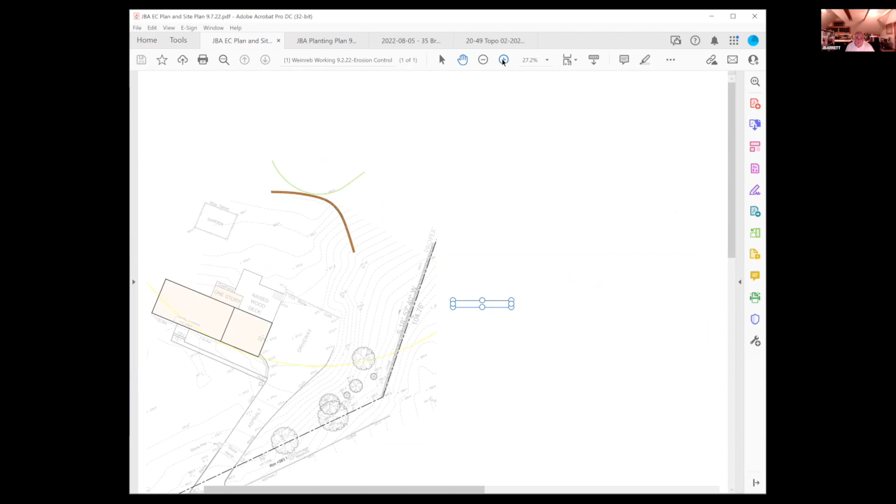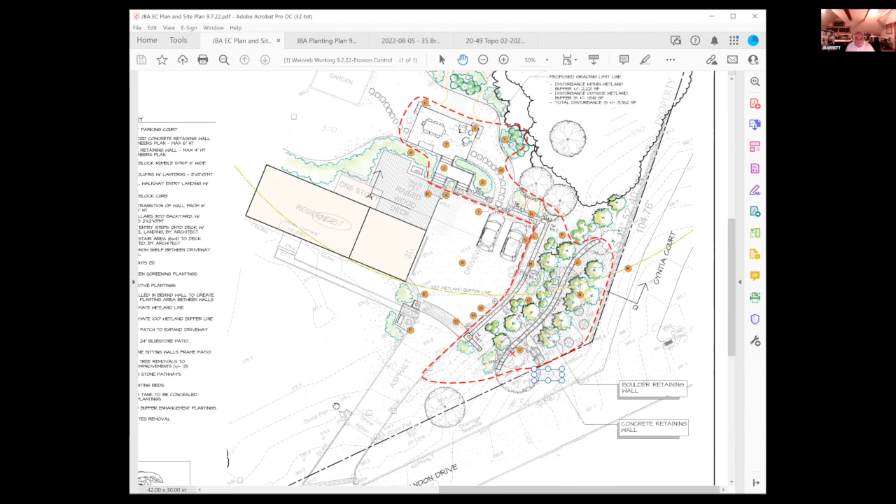So by way of background, the board will recall that this project is on the corner of Cynthia, the new subdivision road that goes up to the Brandywine subdivision, and Brandon Drive. And what happened was, as a result of the subdivision, the clearing and whatnot took place. And while I think the original design plans called for some kind of screening or tree plantings along Cynthia Court to provide some privacy to the Weinrebs, whose rear yard this is, that didn't happen.

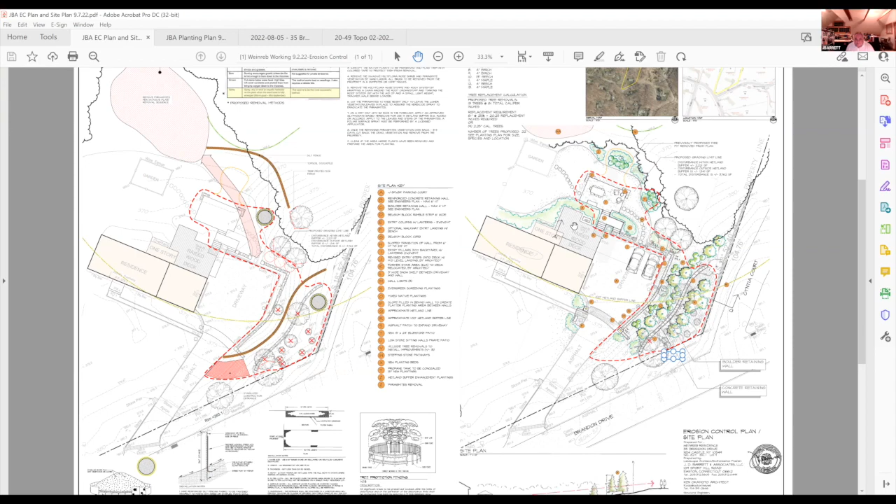That combined with the linking up of open spaces in town, and there's now a little hub where you can park your car. And there's just a bunch more traffic on here, and the Weinrebs enjoy their backyard, but they felt like they lost their privacy. And we were retained to say, what can we do to help them get that back? So we talked to town staff, and we came up with this plan.

So essentially, this is their back deck area, and this is their driveway area, and this is Cynthia Court. And what happened was, now there's this direct sight line between there. So the idea here is we're going to take this existing sloping grade, and we're going to create like a parking court driveway area. There's going to be a wall. It's about 3.5 feet here, and it goes to about 6 feet in this corner.

And what that does, it kind of gets that grade up. And then we're going to do a boulder wall up in this area here. That's going to be about 3 or 4 feet. And the idea is to get the grade up so then we can come in and put in 10 to 12 and 14-foot evergreen trees.

On this shelf in here, we would plant evergreen shrubs and some native material. So the idea is when the owners look over, they'll see the wall and this evergreen screening, but they really won't see their boulder wall. The idea of the evergreen screening is to regain their privacy.

So that's been fleshed out. We have a planting plan for that.

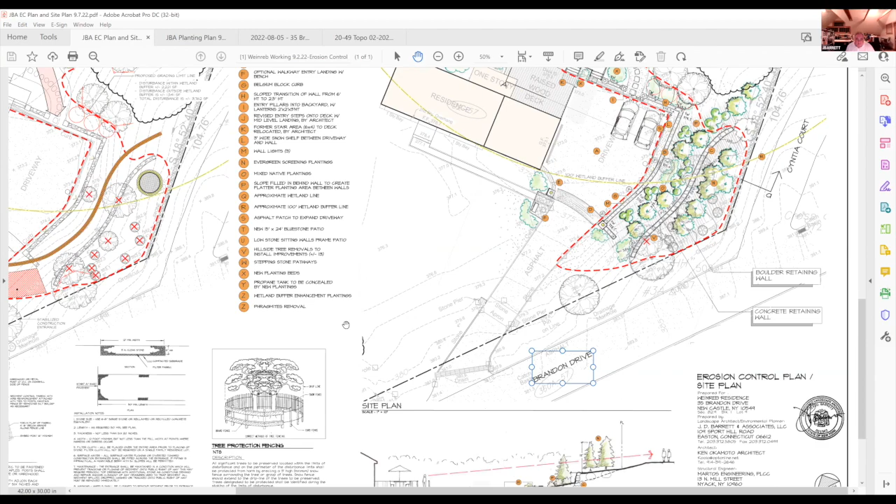You'll recall the owners decided to improve things. Right now they have a very awkward way to get up on their deck, so that's going to be closed off and they'll regain this deck space. There's going to be a break in this wall and then some stepping stones, and a lower patio in this area. Previously there was a fire pit here, but that's been eliminated from the plan. Instead there's just going to be a small patio that steps up. You'll come in, step up a couple of steps to a landing, go down a couple of steps to get to the patio, and up a couple of steps to get to the deck.

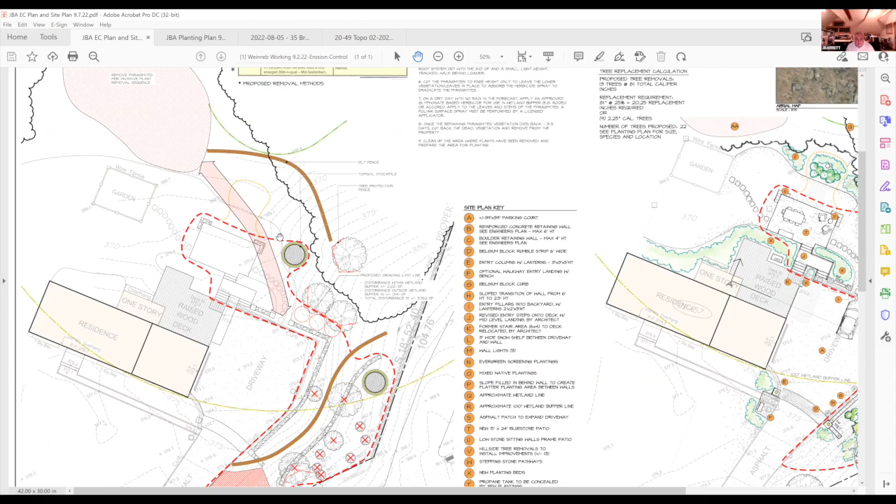So we showed an erosion control plan. There'll be silt fences down slope of all the work areas. We show the grading and clearing limit line in red, and this was the area where that Phragmites has taken over.

There are various methodologies to take out Phragmites. The one we prefer, which the board may remember reviewing and endorsing on the Rabinowitz property on Gary Drive a couple of years ago, is to come in at about this time of year, cut down all the Phragmites, drag it out, and put it in a dumpster in the driveway where it gets taken away. Then the Phragmites is allowed to sprout back up.

When it gets to about knee height, they'll hire a licensed applicator to come in with rodeo, a form of Roundup better suited to wet environments. We'll wait for a dry day, they'll go out there and spray it, and that process will be repeated as necessary until they get control of the Phragmites and get it out of there.

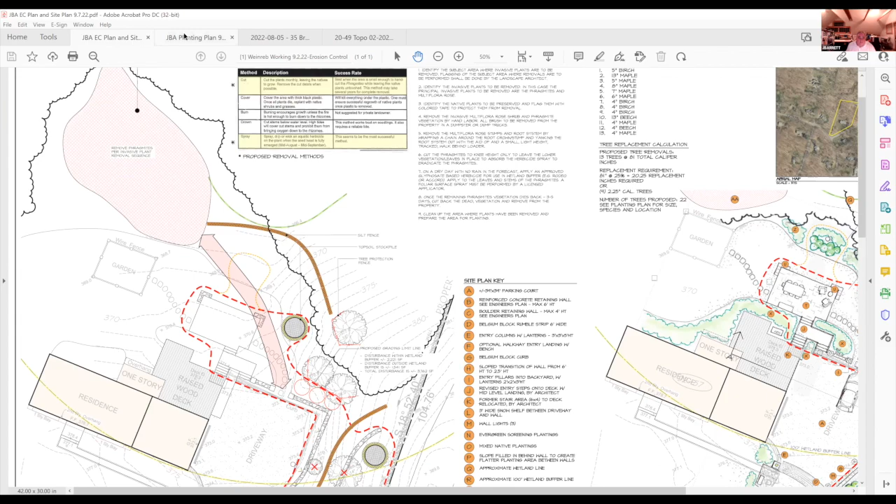So once that's all done and the walls are built - the boulder wall and the other wall - we've developed a planting plan and mitigation plan. Here's our wetland line, and here's our 100-foot buffer line. These are the evergreen plantings that'll happen up higher on the slope to block the views.

This is the shrub layer, a lot of evergreen in here. We're taking out 3 large doublefile viburnums in this area and we're going to transplant them around the property. Then we'll put in some Limelight hydrangea and inkberry to kind of frame this area.

When we get to the edge of the lawn going down toward the wetland, we've got groupings of perennials and some shrubs and small trees like dogwood. And where the Phragmites was, since it's pretty open, we're going to try to close this forest edge back down so it comes across here - 3 red maples and some smaller shadblow trees to kind of layer it.

We'll also be doing some shrubs like buttonbush and elderberry in groupings. And we have large swatches of Joe Pye weed and New York ironweed to colonize the area, which will give nice color in summertime, plus some shrubs around the edge. So that's where we are.

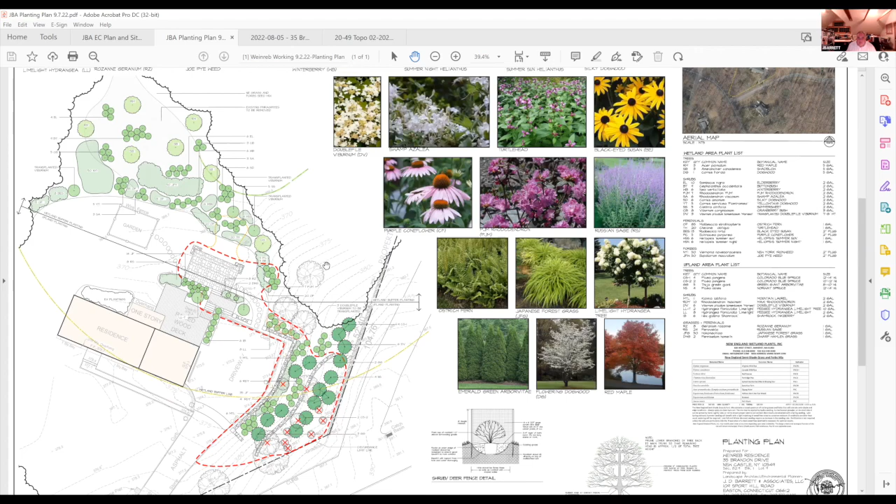I think the last time we met with the board, they wanted to see more information on the planting, the mitigation, and the erosion control, and they also directed us to file with the building department, which has been done. So we're back now and we're hoping we can move this thing along to a conditional approval so the owners can schedule the work.

Great. Thanks, Jerry. Dennis, what do you think?

Only a recommendation: if you're going to cut Phragmites this season, I wouldn't be averse to getting a first application in. Sometimes that translocation process, when they bring their nutrients back to the roots in the fall, you could have them bring some of the poison with them. Then in the spring that almost represents a second application for what you didn't get. That's just a recommendation — the owners' reps, if they've hired someone who uses a different method, that's fine. But that's what we would do for wetland restoration: try to get a first application August into September. That was usually the window.

The only other comment I was going to make — these were observational, since I like walking through wetlands — at the owners' rep's place it was helpful because I accidentally stepped on one of the landmines while playing with her dog back there, and going through the wetlands helped remove all that landmine remnant off my boot. But I had taken notes just for your benefit.

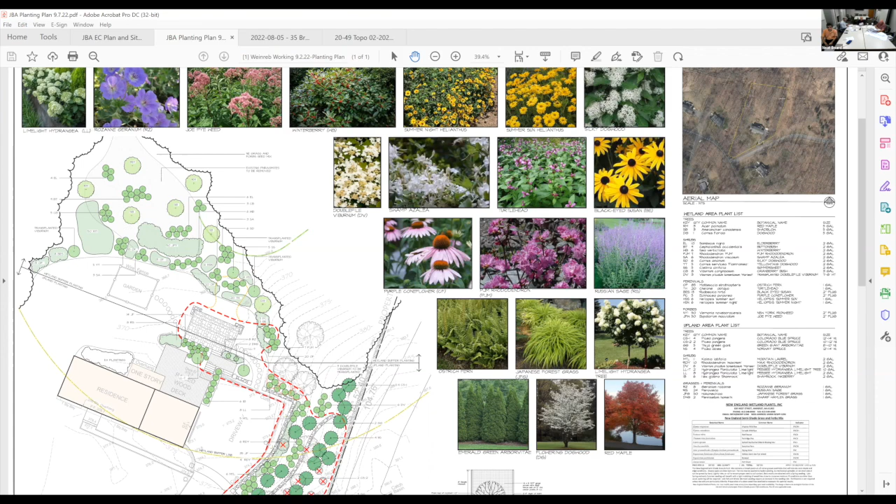I have a question — are they going to start this fall? I think if they want to clear and spray, I'd be fine with that, because otherwise you're getting delayed months just to apply herbicide. And this is the recommended time — even if they didn't have a project associated with it, and somebody said to me, we want to plant natives and get rid of Phragmites, would you approve this? I'd say yes, now's the time to get rid of it.

Just even to get the wall in place, planned in November. Yeah, still good — some of the evergreens especially, you can go up until the 15th of November, shouldn't be an issue. And the construction, that can be done through what, December? As long as it's not 20 degrees.

Right, that's concrete. I think the owners would like to get going as soon as they possibly can, so I'm going to discuss it with them tomorrow, but I'd like to get that Phragmites out of there ASAP. If we can get some of that stuff to regenerate in the next month or so, we might get our first application in — I think that's the best case scenario. Right, makes sense. Good luck. Yep, okay, thank you, bye-bye.

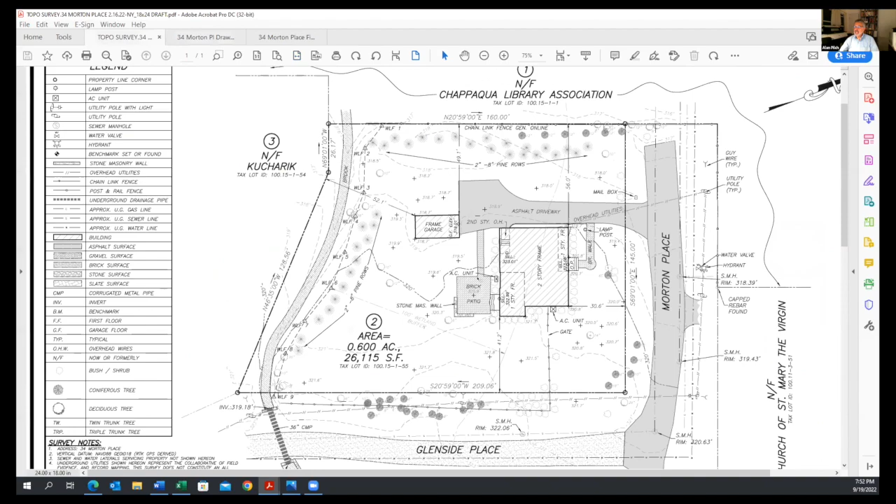The other thing being proposed is a flagstone walkway to connect from the driveway to the addition and also into the house. There is an existing brick walkway here, but that'll be removed and replaced with a flagstone walkway.

This also shows some of the erosion controls being proposed. When we reviewed this, with the proposed addition and the wood deck, we calculated an impact to the existing condition impervious surfaces in the wetland buffer of 2,649 square feet.

With the modifications to the plan, that would increase with the addition and the construction of the deck over the brick patio, to 2,922 square feet, for a total increase of 273 square feet in the buffer.

What is being proposed as mitigation - I could show you a picture of this - the way the runoff flows on this property, it all essentially flows behind the garage and out this way to the water course, which flows from north to south.

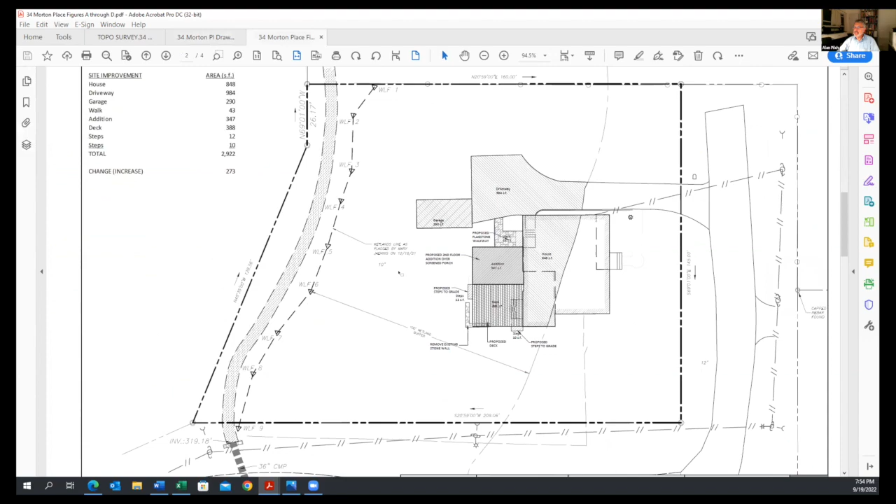That's essentially the plan that we had developed. We also looked at the total amount of increase in impervious surfaces, and saw that from the existing condition to the future condition, we calculate an increase of 342 square feet of new impervious surfaces, which would put us below the 1,000 square foot threshold.

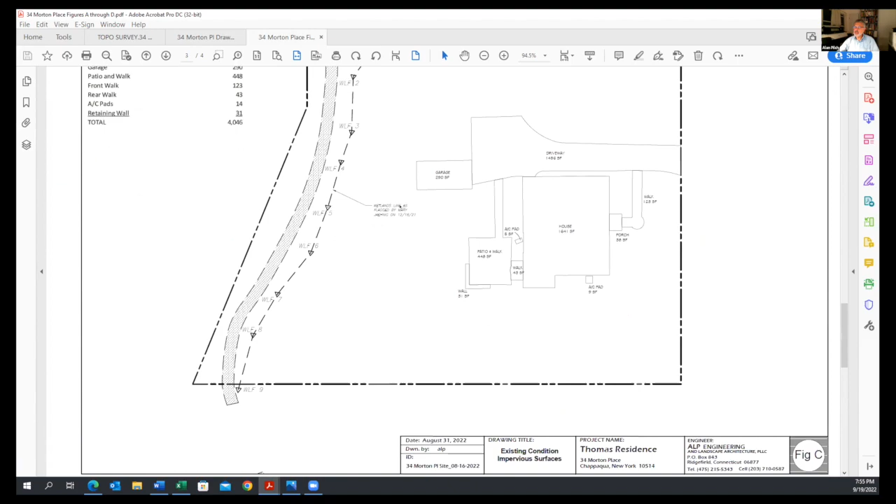I'll just say, Tim, is there anything else you'd like to add to that? Just that the foundation of the screen porch second floor addition is going to be built out of individual brick piers, like 2 foot by 2 foot in size, to avoid digging out any full depth foundations and minimize impact, I think, for the land and certainly any issues that could possibly occur in a new foundation there anyway.

Right. And the fact that we're removing that patio and the deck will have gaps in it to allow water to pass through where it currently can't. So kind of swapping out the patio for the addition, in my view. Right. And typically what we do is put a little stone or something underneath it. Correct. And so I can unshare if you like, or I can just continue sharing. No, that's fine. If you could leave it up, that would be good. Okay. Great.

So Alan, what's the height of the new deck? Is that going to be basically at grade? It's going to be slightly above grade by about 1.5 feet, because right now there's a few steps down from that 1-story area you see there adjacent to the deck. You come out a sliding door down, I think, 3 steps onto the patio that's on the ground, but we're going to have you coming out flush from that door. I have my plans up too, if you want to take a look and see what the elevations are going to look like.

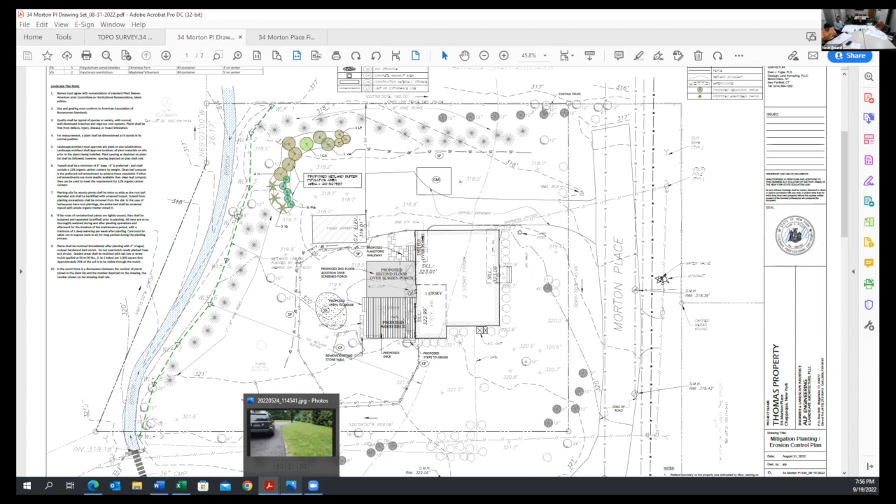Sure. And I will unshare. Okay. So no crawl space or foundation under the second floor. Doesn't sound like it. There's a screen porch. Yeah, I can show you also. This is the 1-story area where you currently come, from Glenside Place. You come down those few steps onto the current patio, which is right on grade. The grade's essentially flat around this section of the property. So the floor joists will be up in here, and there's just a screening to keep critters out from underneath, but it's basically just earth and gravel underneath this deck.

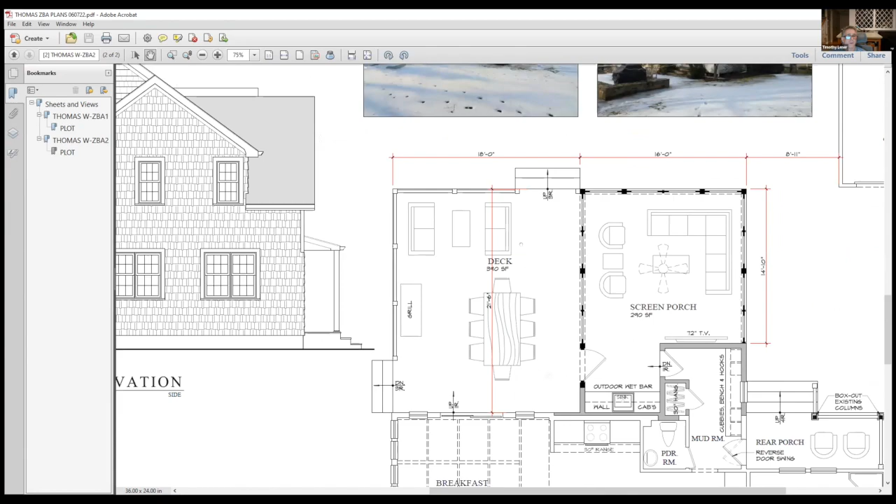If you like, I can show you a picture of what it looks like back there as well. I've got that too, Al. So here's where you see the foundation piers supporting the structure. And again, it would be as minimal digging as possible. So here's the view. It was a little cold when I was taking these, but you can see this is that little rise Alan was talking about. It's essentially flat. The water runs off towards the back of the garage over there. And this little corner wall is what defines where that patio currently is. And you can see the steps coming down from the dining area right now. So all of this is proposed to be removed.

Yeah, if you unshare, I could just show you a picture too that I have. For a moment. You can also see it here. This is where the patio will be removed. This is the wall that's here. You can see it's up like 3 steps, so it's like 1.5 feet up. And that's where the deck's supposed to go.

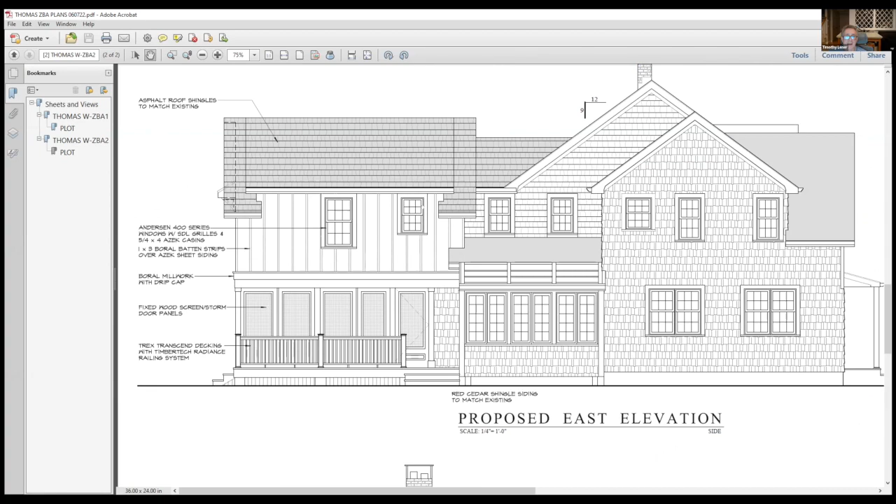All right, could you take us through the elevations on the new structure? The architecture? Yeah, just put it up again so that we can see what it's going to look like. FYI, we got zoning and ARB approval already, so they kind of liked it. So here's the view from the road again. All of this is existing house here. The screen porch is going to be made up mostly of screen doors with panels that you can swap out when it's cold. And up above, we've got a bedroom and a bathroom over here. We're remodeling some bathroom laundry space over there.

And this is the back part that faces the wetland, so to speak. Everything here is basically existing. We're dressing up the rear porch. These are the steps down from the existing rear porch that Alan mentioned before, and this is the walkway over to the driveway, which is over here. So we've treated the addition to specifically look a little bit different from the existing house, which is wood shingles. This is going to be a board and batten material here. We've kept the eave lines a little bit low and popped up a dormer to minimize the massing of this thing.

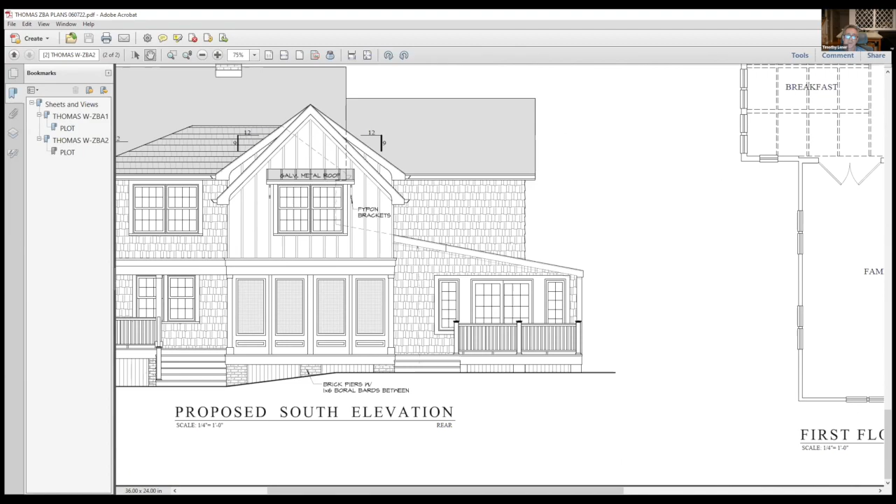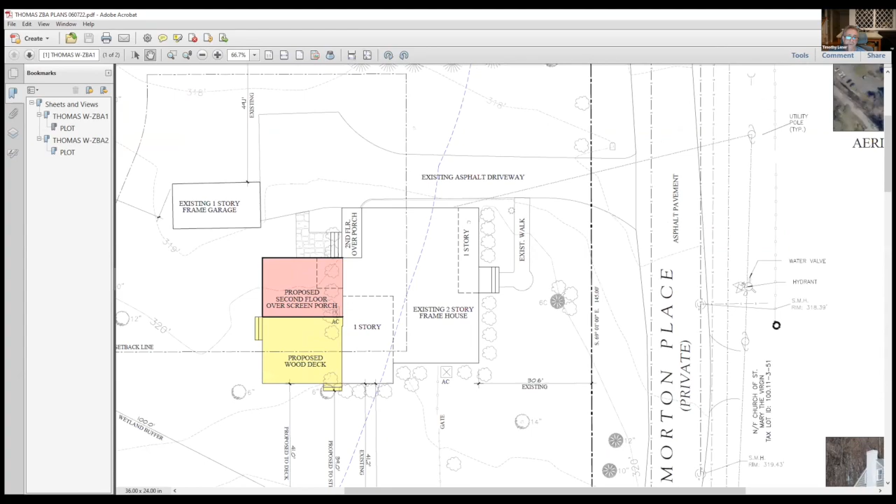Question for you, the flagstone from the existing, it kind of fades out in the drawings we have. Are you saying that's going to extend down to the driveway? So here, my version of Alan's site plan. So yeah, it's not that far. Right now there's a door that comes into the house underneath this porch right here, and I believe the stairs just go directly out onto the driveway. It's kind of a weird concrete structure that's not a very good flow of space for sure.

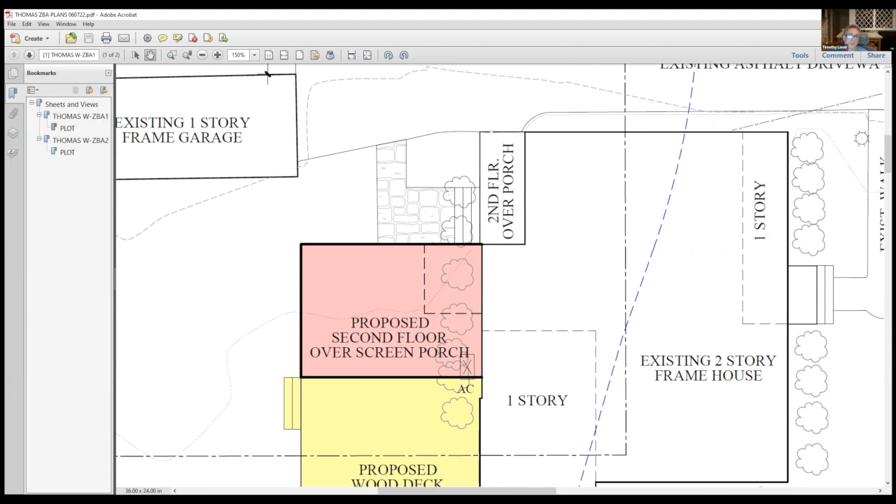So what we did is we relocated the steps down to here. And so we can build out this area of the porch and have a place to sit and watch their son play basketball over here. So this little area is proposed to be new, where currently there's that path that Alan showed on the existing survey that goes roughly from here straight down to the existing patio.

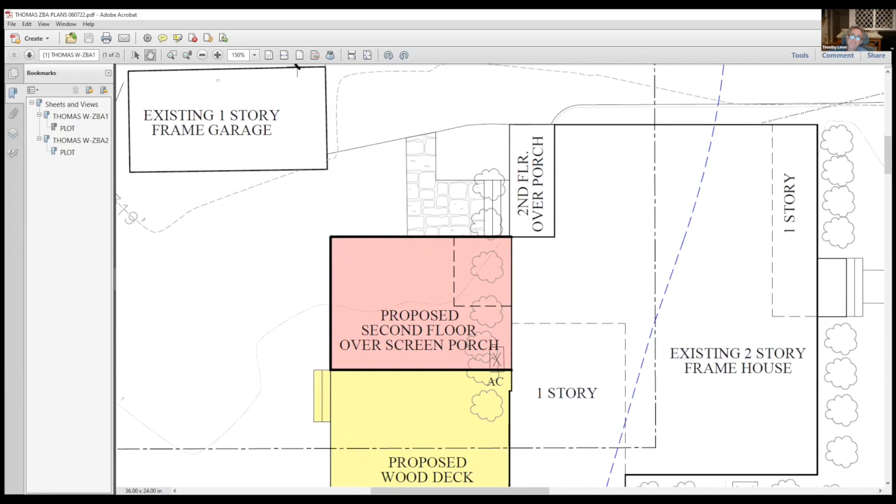Right, there's a brick walkway that goes from the driveway. Yes. So it'll be removed, and a portion of that brick walkway will have the addition, and the rest will be replaced with the flagstone. Got it. And how are they set? Flagstone is typically set on 4 to 6 inches of sand.

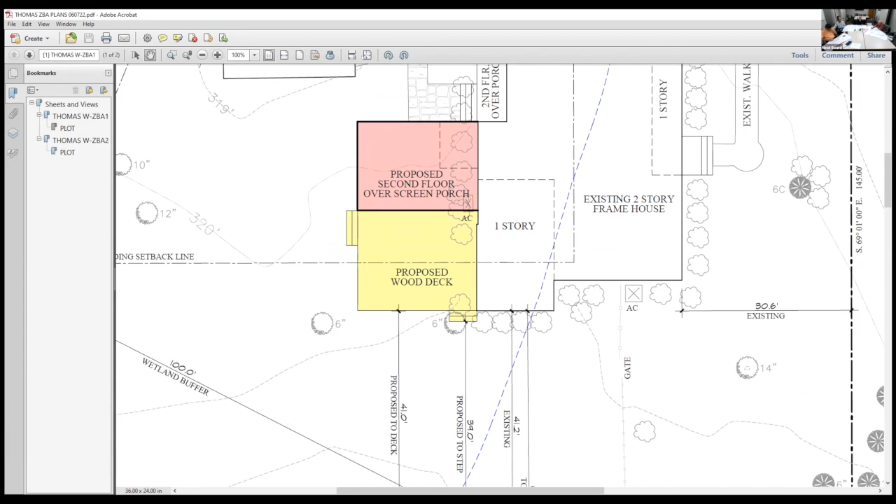Well, yeah, there's 2 ways to do it. It could be done in sand or concrete. We all know the sand is going to move a little bit more than the concrete will, but I don't think we're opposed since all of their existing walks are set in sand. We can propose doing the same thing. What's the existing brick? Is it set in concrete? No, I don't think it's set in concrete. I don't think so either. I think it's set in sand and stone dust.

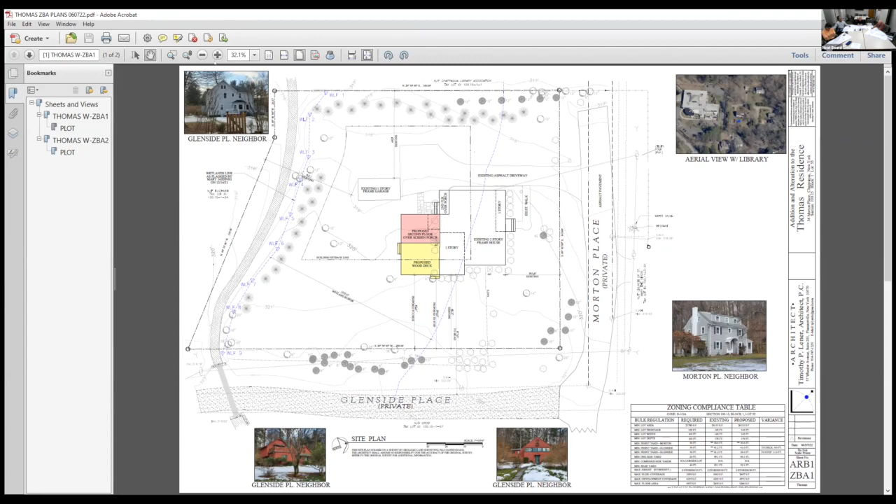So are you saying that in terms of coverage or impervious surfaces, the walks are kind of a wash or what? I counted the walkway as completely impervious, just to be conservative. Yep. I think there's probably more existing walkway than we're proposing here too, right, Alan? I don't know if in your little chart you had the breakdown of both, but I think it's either a wash or we're less.

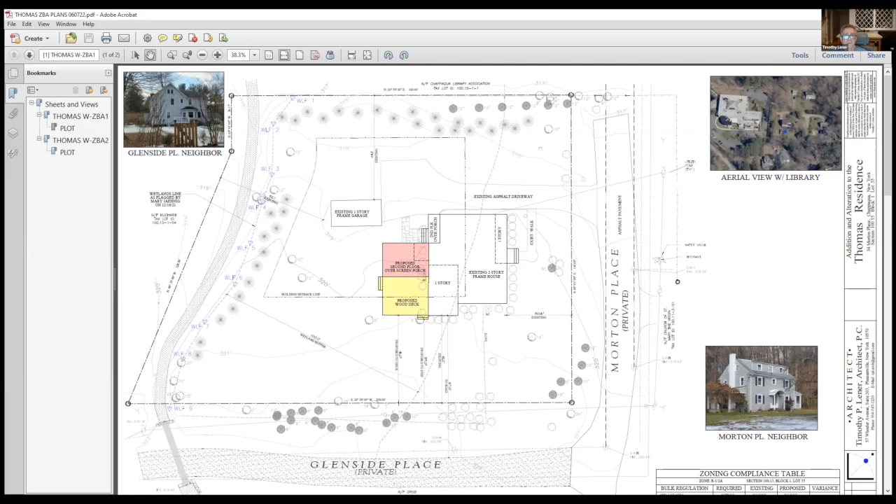Yeah, well, I had both patio and walk calculated together when I did the calculation, so I didn't really split them up. But I had 102 square feet for the new walkway to the rear of the house and to the driveway. And then what are you doing with the leaders and the roof drainage? Where's that going?

Right now, I walked around there plenty, and you see it go into the ground. So I think the one in the front left, if you're looking from the street, goes actually onto the ground surface. That's my recollection. But I think the other ones go into the ground. So they probably either go into dry wells or perhaps are discharged into the water course. I walked along that water course. It's pretty dense, but I was looking for any drain pipes and really didn't see any.

Should that be considered? But we do have just a very small increase in impervious surfaces. Right, so I know we had discussed this last week. The one thing that I discovered while I was out there, because I was a little confused, sometimes my approach is to look at an aerial first, and Alan and I discussed, that driveway has been added to since 2021. It used to just go straight up and down. So I said we should probably wrap that added impervious to the driveway into this application and the mitigation plan.

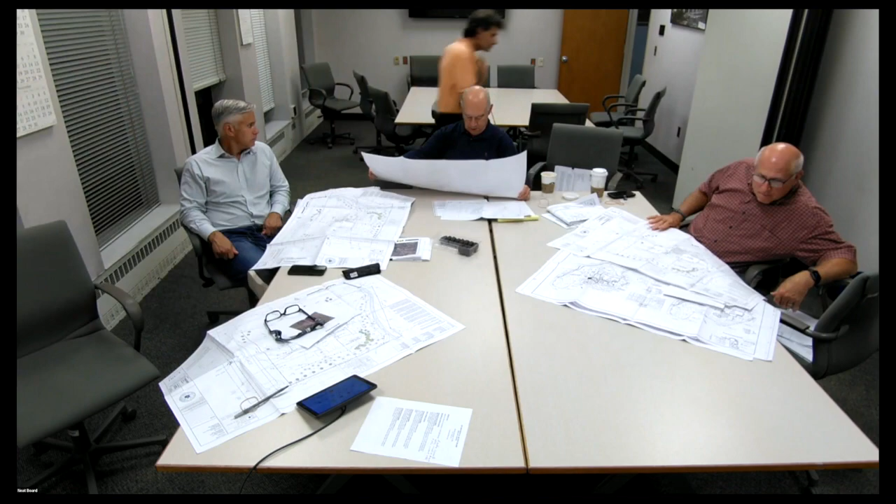That ice cream place or something.

So there's not really a swap going on. Because the patio is being replaced by the deck. So was there any consideration given to going up in the area of the house that's only one story, as opposed to creating new footprint in the buffer? It doesn't really give the clients the kind of space they need, and that's a cathedral ceiling in that one-story space. It's actually more or less a glass roof.

Well, one of the reasons why they asked for the screen porch is because of the buggy situation, because of the wetlands. They really can't use that patio in the peak times when you want to be out there, because the mosquitoes just make it intolerable. So they did ask for that space, and trying to combine that space with the spaces they need on the second floor, where the bedrooms are located compared to where the bathrooms are located, the flow of the space worked the best with where we placed it, and removing the patio and basically getting that back to being a deck with the open slots to at least make that part more pervious.

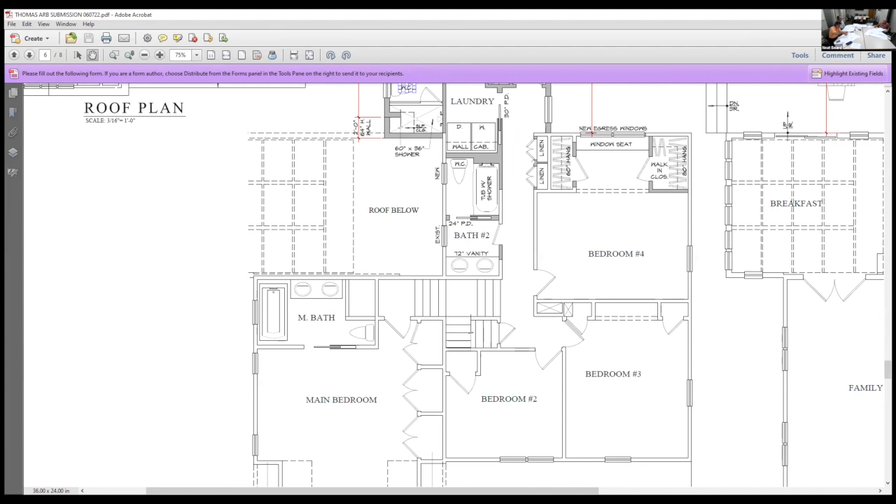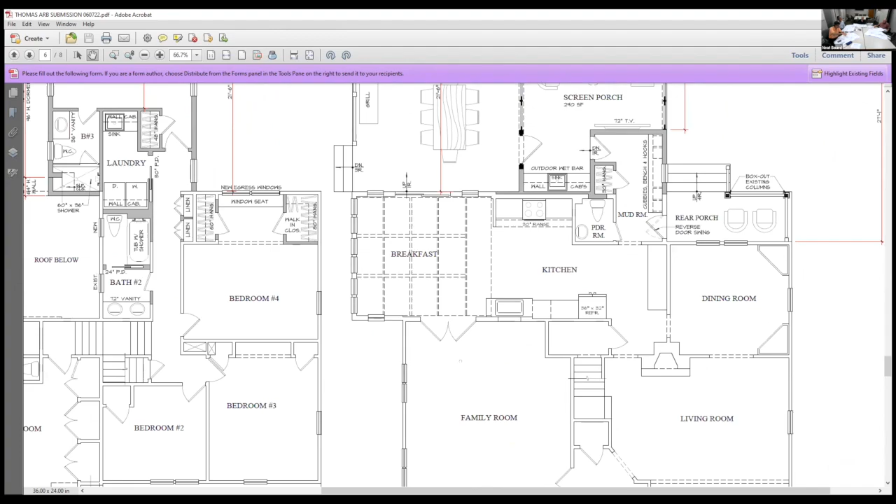But this is a different brook than the one that comes down from the temple, right? The Greeley property, that's on the other side? I don't believe so. I believe this is the one that feeds and goes around the library and then to the stormwater basin that they just dredged out, I think. No, that's over by Bell, that's between Bell and the church. Right, Ted? I don't know.

There's that path that comes downhill from the temple, and it goes right by the main part of the brook that comes down. Yes, so that's different. Oh, that's okay. This is, the church is here, I guess. Right, and that's on the other side of the church, between the church and Bell. Okay. Right.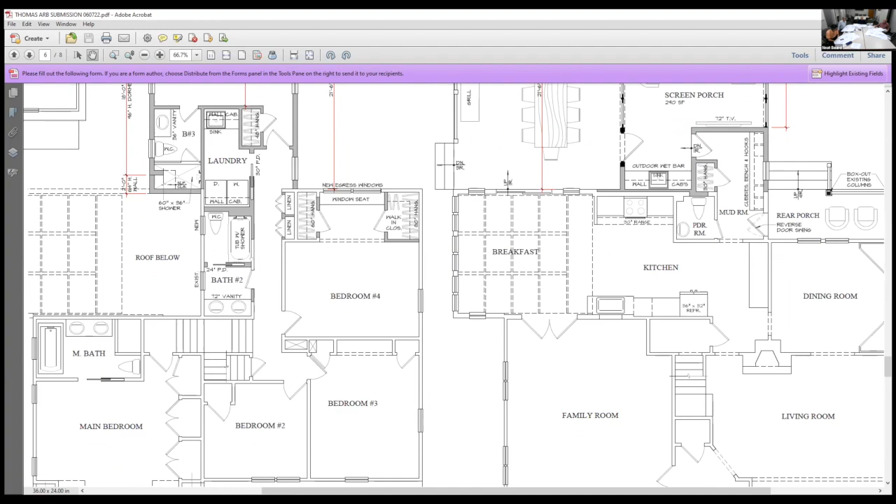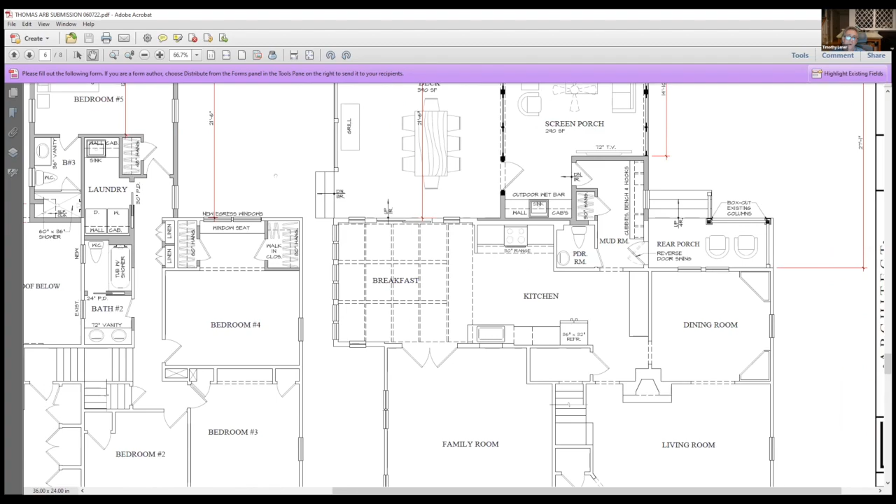So to go back to the floor plans, this is the area that's the one story, and all those dotted lines represent glass panels that are up in that roof there. And you can see the layout of family room, living room, dining room, kitchen. So this space out the back is where we would be accessing the screen porch from, this little mudroom bump out into the porch. But on the second floor is where it's really far more problematic, because right here is the area where there's currently a laundry room and a bathroom that we're reorganizing a bit.

So to build a bedroom over here, there'd be really no way to get to it because these spaces are blocking it from the rest of the hallway. And there's also a change in stairway here. You come up to a landing that's about 3 or 4 steps down from the second floor. So you actually have to go up more steps to get into this bedroom, which was added back in the 90s sometime. And this is the main access for the children's part of the second floor. And like I said, this space here is just a blockade for everybody else to use these rooms.

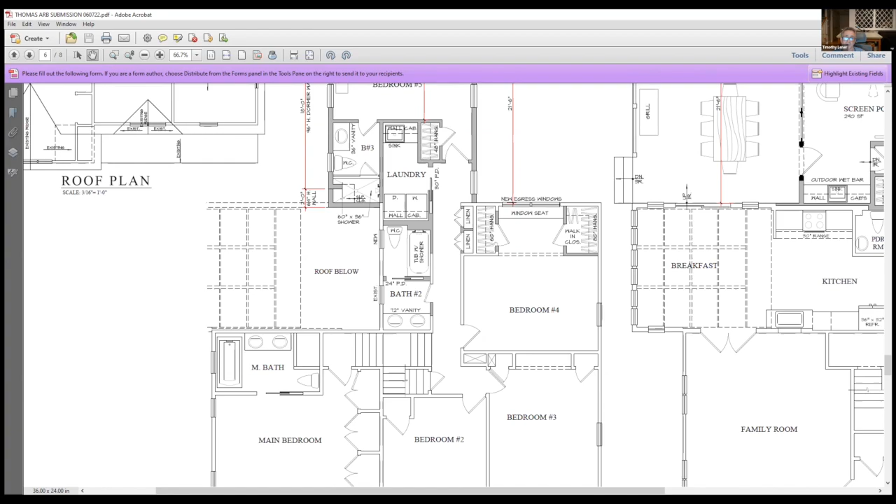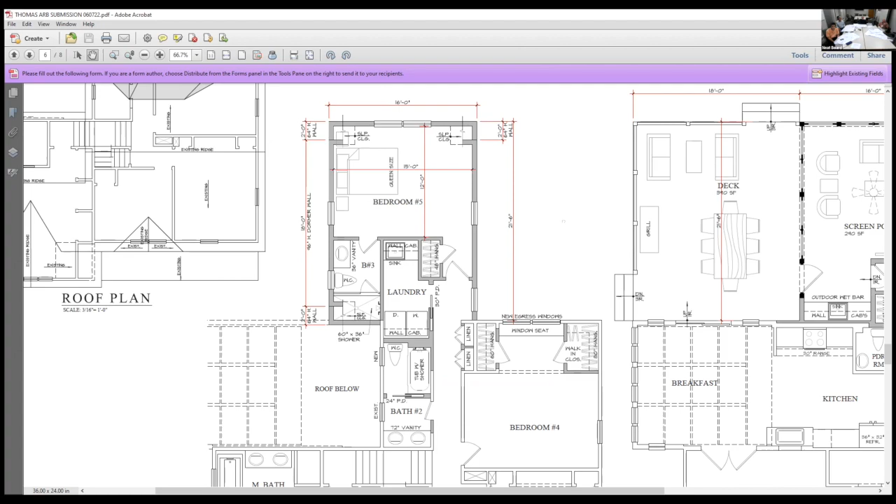Even if you were going to give up the cathedral ceiling above here. The back walls. There's the bedroom. So that's the problem. Can you just slide up the screen, please? Thanks. Yep, perfect. No, if you see where it says roof below? Right. If you built it there,

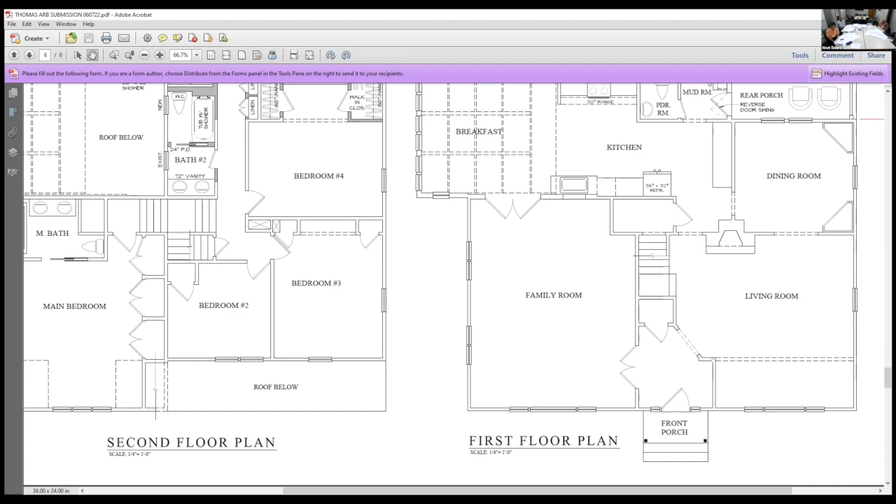So you'd be talking about building a pretty major addition to the front of the house on the second floor where no space is needed in that part of the first floor. And I also wouldn't put a screen porch out in the front of this house. So this is that area where you come in an entryway and there's a little bit of a roofed area here. I'll show you the front. I'm talking about going up here. That's one story. Where it says roof below, put the bedroom there. That's only about 4 feet wide.

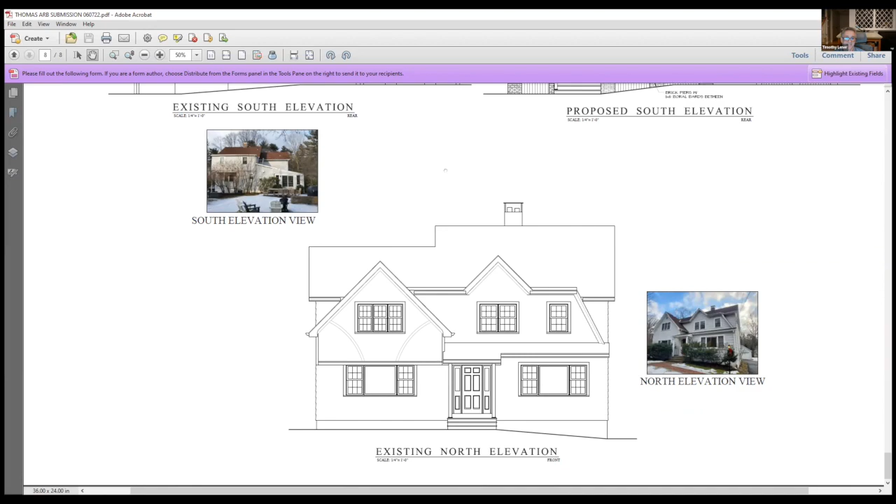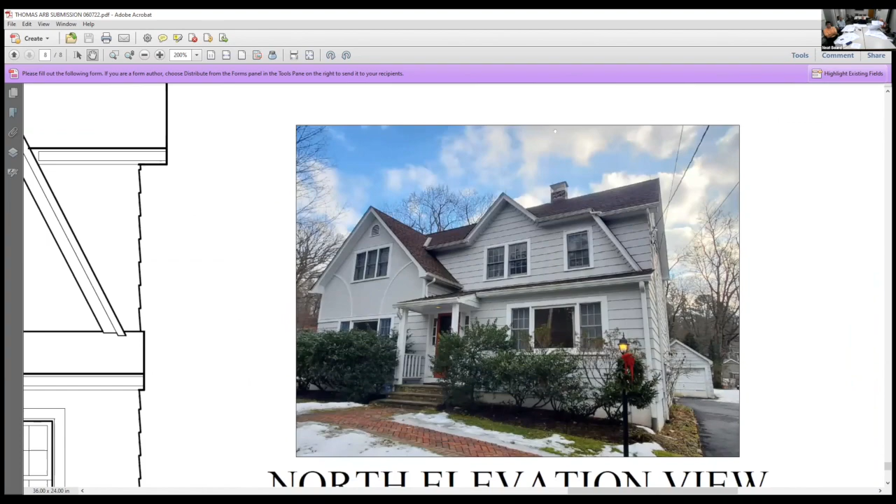You can see on the picture what it looks like. No, see where it's in the glass? Yeah. What happens if you take out the glass? Just go back to this. Can't get to it. You can't get to it from the plan. It would also give me a pretty challenging roof line to build above this section, because this is what it looks like currently. There's that sloped roof with all the glass in it. It would be creating a problematic roof area for me to try and build above this.

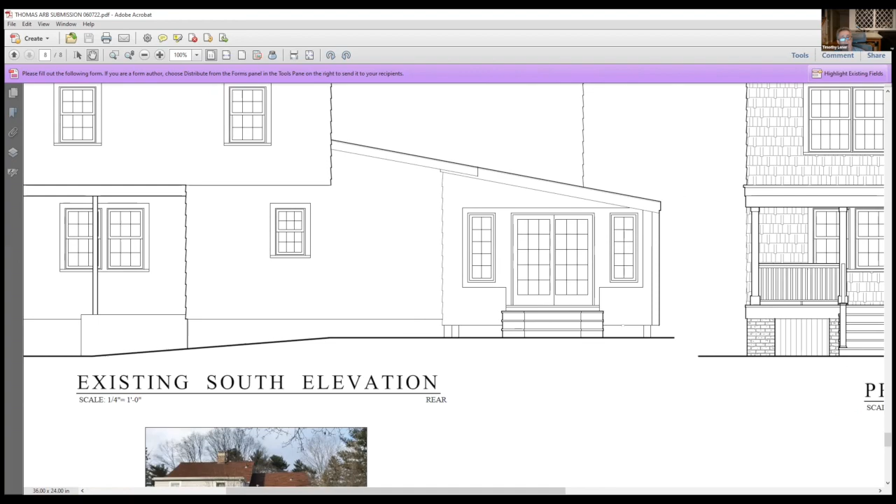And this glass room was added on, again, back in the 90s or something. And it's built on little piers that probably could not support a second floor. The basement area ends here under the kitchen. This here was an addition at some point. You can see underneath, this is actually open space right now. There's no foundation. It's just a couple of sonotubes holding that up, which certainly could not support a second floor. That's a more persuasive answer to me.

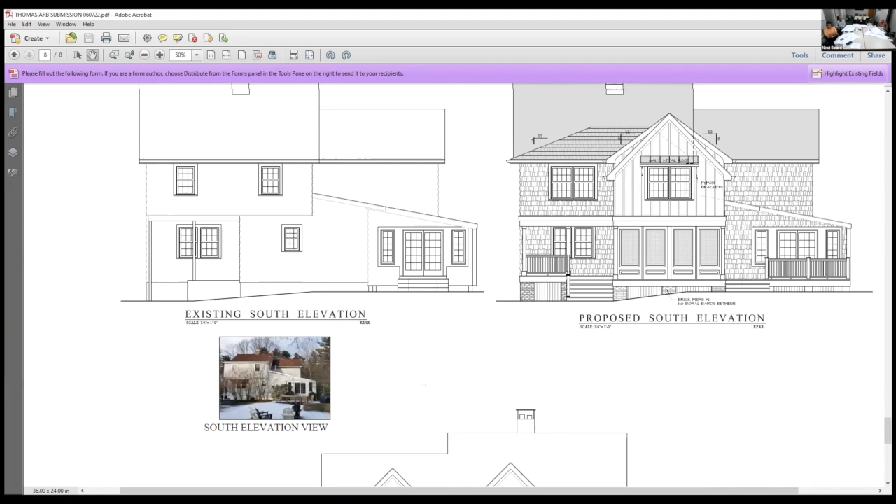Yeah, makes sense. Again, if that's all currently permitted, and existing COs and all that, I guess it must be. I guess I'd have to verify that, but yeah, this was all done legally. The building department has it on their record search; all of this is legal. I actually got the plans from them. Got it.

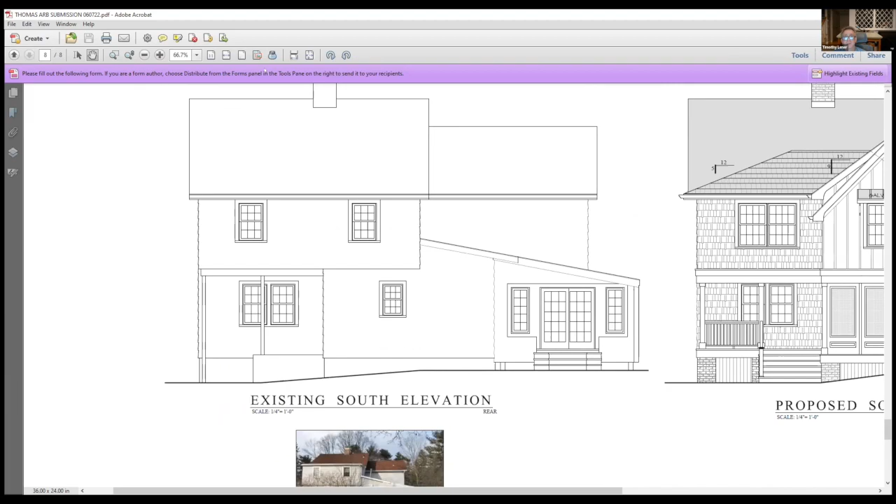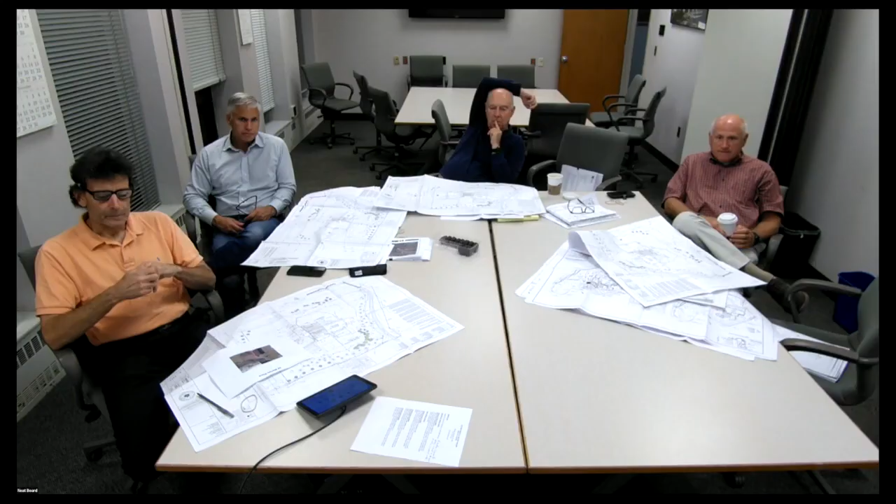Okay. Then my last question would be just, what are you doing with the roof leaders and drainage off the building? What are you dropping that into? Alan, it wouldn't be wise on the new structure to put Cultec or anything in here because of the water table, correct? Yeah, typically you wouldn't want to try to do that. Usually you put in some type of rain garden, perhaps, if you have even some, I'll call it unsaturated soil below it. But there's very little grade across this property, and that's what makes it challenging. The rear yard is virtually level. The grade is so slight going across it.

And I think some of the additional plantings in that mitigation area, by expanding it as well, will help. We're talking about removing lawn that contributes nutrients to the water course. There's certainly biological uptake which would occur there as well, so there is an advantage to it. It also probably blocks some of the runoff from the driveway, which I'll say has the potential to be more contaminated than runoff from a roof.

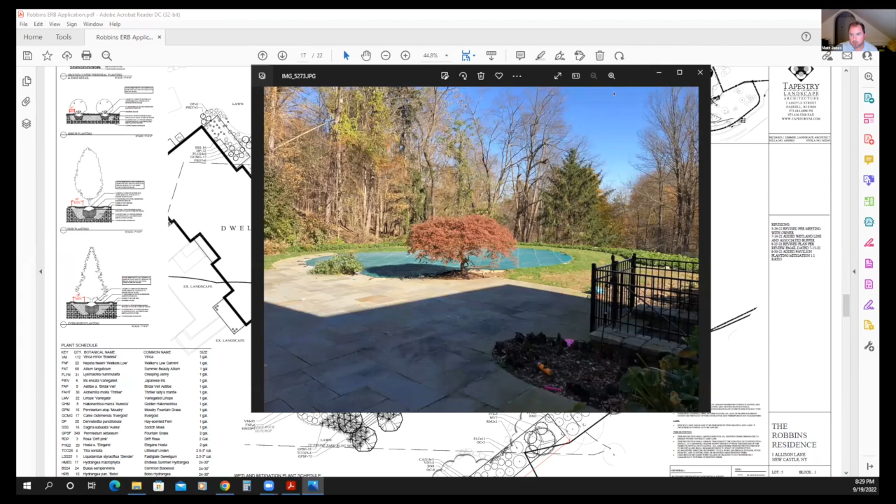So as part of this project, we want to, off the front right corner of the house, add a walkway that'll take you through a little... You're breaking up, you're freezing. It's frozen.

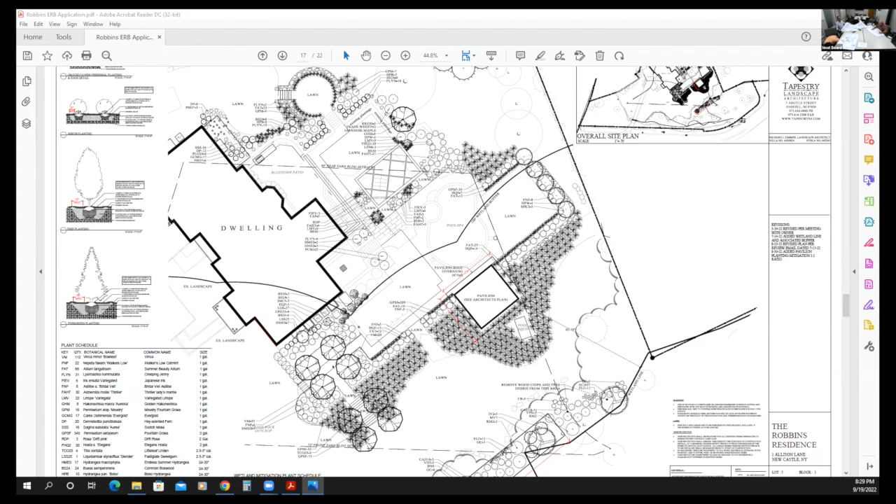So I take it this is the before drawing, and this is the after drawing. Those are the site plan. Yeah, this is the existing condition. And this is...

Right, and where does the 100-foot buffer cut through the house? It cuts through right through the middle of the pool, looks like. Through the middle of the pool. You see it from here? Yep. Actually, it doesn't touch the house. Oh no, no, yeah that's right, it makes a right turn here. Yeah.

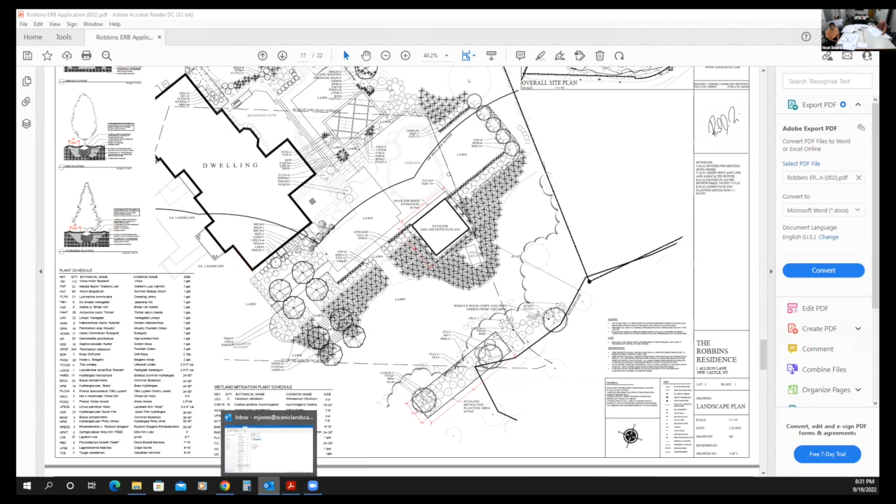Can anyone hear me or see my screen? Yes, both. Okay, it does say my internet connection's unstable for some reason. Jeff, can you—if I send you this, can you... you froze again... share the screen and maybe I can just talk? We hear you, so keep going.

Okay, yeah, okay, so starting at the front right corner of the house, we want to add a pathway that'll lead you back, part of that is inside the 100-foot wetland buffer. There's also a pavilion, an open air pavilion proposed, that's at the same height as the pool.

So as far as existing topography, the pool is around the 405-foot contour. Then once you get right past the pool, it slopes down, 10 feet below the pool is the pool equipment. The grade continues to slope down, and then you enter into the woodlands where the wetlands are.

So after talking with Dennis and trying to find ways to mitigate, we proposed a pavilion, and then next to it, a mitigation planting that consists of viburnum, clethra, serviceberry, magnolia, and some cinnamon fern. That is all mitigation for an area where some wood chips and debris were left from tree removals. So that would get cleared, and then that area would be replanted with plant species that do well in this kind of shady, wet environment.

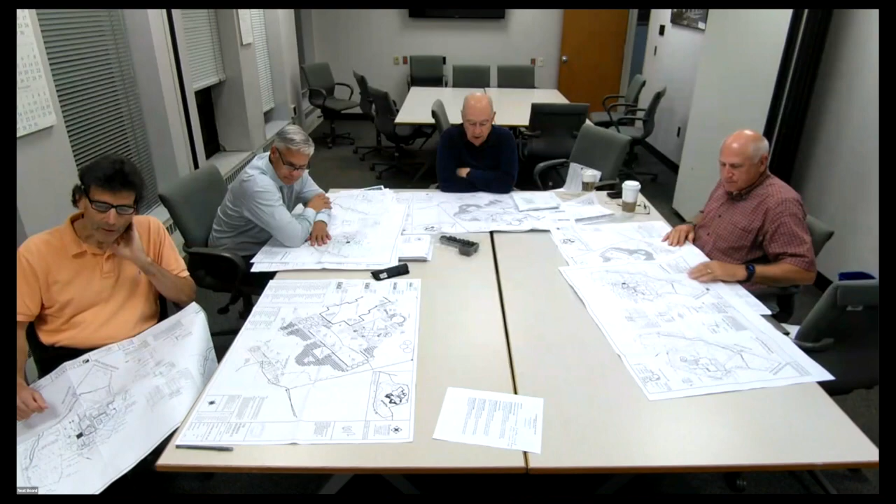Have you considered or applied for a zoning variance? They do get issued sometimes, and if the consideration is to avoid wetlands, that seems to be a reasonable ask.

We didn't. We were trying to avoid a zoning variance. And I'm looking at my plan now and I see there's a 60-foot setback that cuts across the middle of that zigzag pattern patio in the center, right behind the bump out of the house. So we would have to go and ask for a variance there too.

I think another natural spot would be where we are proposing that retaining wall, if you take the pathway from the right side of the house and go past the pool, and we open it up in that spot, it'll be further away from the wetlands line. So instead of like 63 feet to the pavilion, it would be more like 75, 80 feet. That feels like a natural spot for it too, but then it would require a zoning variance also for setbacks.

I'm sorry, I'm not following you. Where? If you look at the landscape plan, I have the label 100-foot wetlands buffer, and then there's a lawn pocket there. That would be another nice spot for the pavilion, but it would require a zoning variance for setbacks. But it would be further away from the wetlands line than the current pavilion is proposed now. But still within the buffer? Still within the buffer, yes it is.

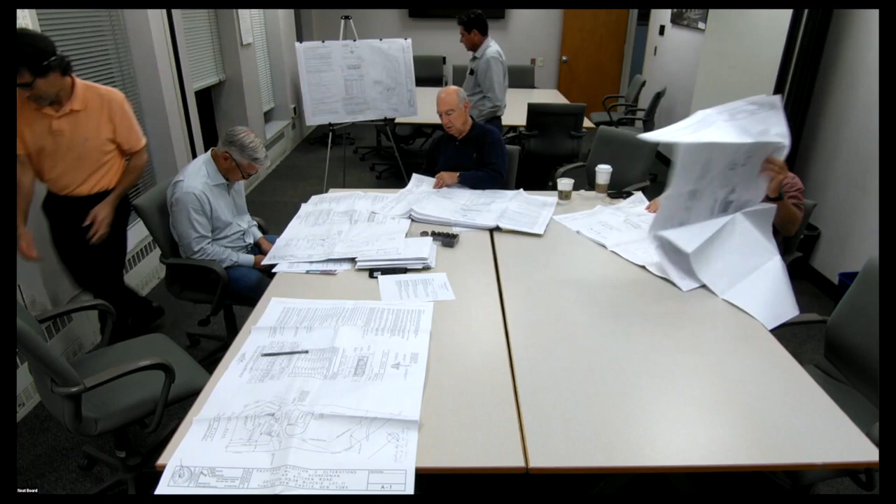Good, Griffey from G Associates. So what we're doing here is we're adding a couple of additions to the home. One on the left side, which is in the buffer, and the other one is the back of the house, which is actually out of the buffer, just a proposed roof deck. So on the left side of the house, this is the buffer setback.

From which direction? From the left side, you see that line, the brook is over here, this is the setback line. Got it, okay. So a good portion of the house is already in the buffer. And the house was built when? I think it was the 1950s, 1957. Right, so well before the wetland ordinance.

So we're renovating the master bedroom and adding closets and a master bathroom to the left-hand side over here. We're lining up with the existing house here and then kicking it back a little bit and then adding this addition here, about 424 square feet.